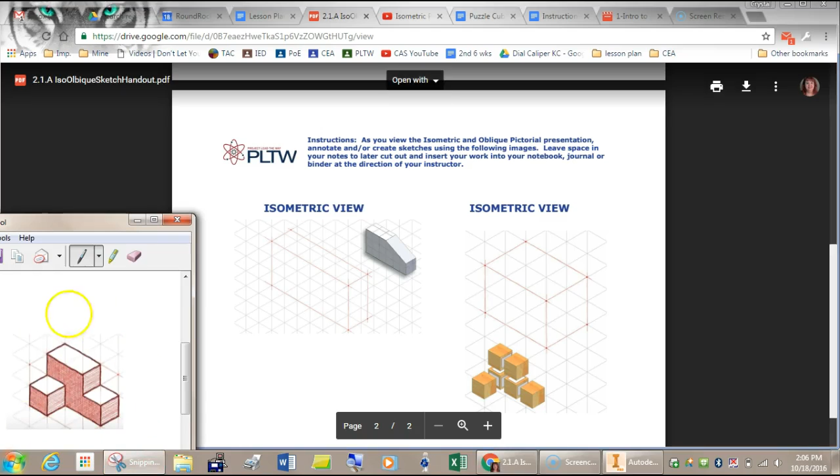Okay, I'm going to show you how to do a practice piece here. We're actually going to make the piece that we originally did right here in our isometric drawings. And I have the drawn one over here for us so we can look at it. And we're going to make that in Inventor.

I just open up Inventor, and what I want to do is I want to make a new part. And I want to make a standard part here, but I have to make sure I'm in the right project. When I click on projects, it should have this other Inventor checked with a check mark. If it was on another one like this, you just double click on this and it pops over there, and now I'm good, and I'm going to hit done. And I have this highlighted, standard part, and I'm going to click create.

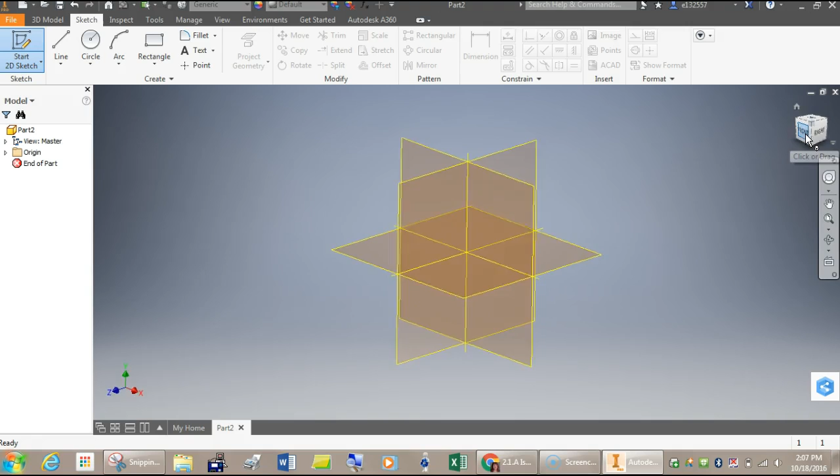And I have a blank place that I'm going to create my part. So the first thing I need to do is I need to sketch out my part. I can click here on sketch, or I can click here on sketch and hit this one. And this is my three planes. Notice my little window over here. This is the front side, and the front side goes with this side here. This is the right side that goes with this plane here, and the top view would be if I look down on this plane. I find it easiest to explain to you if I just show you by clicking here on front first. This is the plane we're going to sketch on.

So we're going to hit Start Sketch, and I'm going to click on this one here to start my sketch. Now you can click on line here, or you can hit the L button to start a line. Either way. And if I start with the little green dot here, you'll notice the green dot is right at the origin. Now each one of our cubes, our little wooden cubes, is going to be 3/4 of an inch. So our first little piece here, it's 2 cubes high. So 2 cubes is going to be 0.75 and 0.75, which is going to be 1.5 tall.

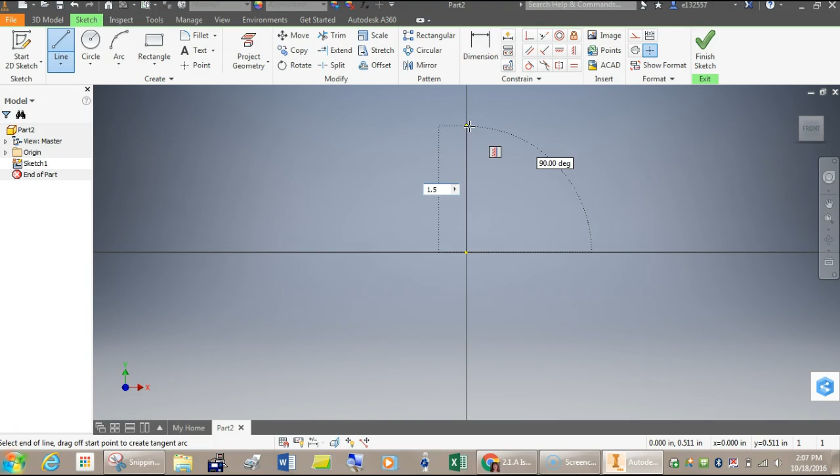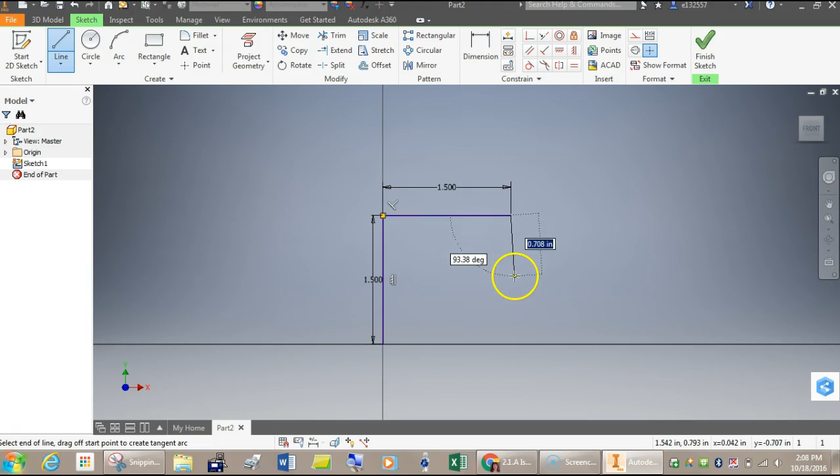So I'm going to type in 1.5, and when I hit enter, it's going to pop it up there for me. I'm going to use my scroll wheel to scroll out, and I'm going to push it down so that I can bring this over so I can look at it. Now I'm going to come over this way, and it needs to go 2 blocks over that way, which is also going to be 1.5, and hit enter. Now I need to come down 0.75, so I can just click 0.75, enter. Over this way, 0.75, enter, down, 3/4. Look, I can even do 3/4 like this. It knows exactly what I'm doing, 0.75.

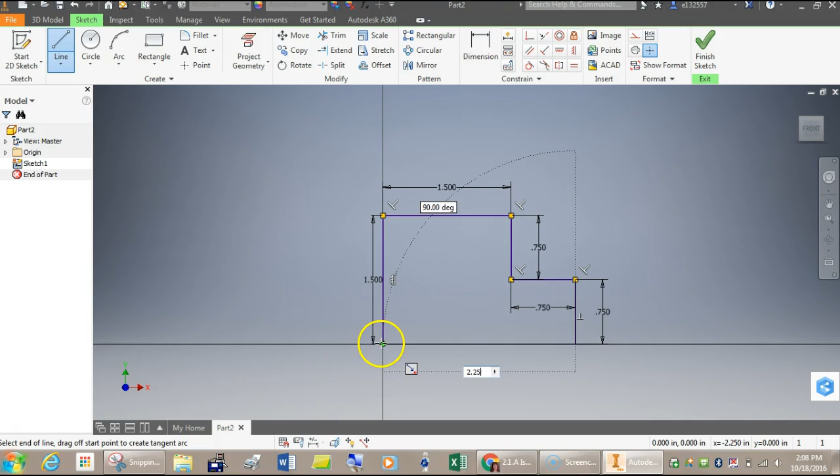And now I need to come back over. 0.75 3 times is 2.25. And I can click enter. Notice it's also right there where my green cursor is. Enter, and it's closed that box off. Right click, OK, and it finishes that up. So it's not trying to draw any more lines. And I have to click the Finish Sketch. I'm going to once again scroll a little bit and pull it over so I can see it. Now I've got a flat 2D shape.

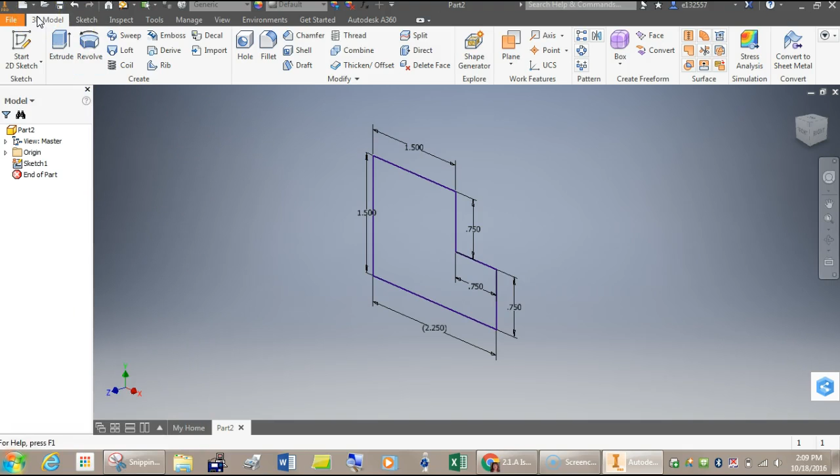I really want it to be 3D. I need to bring this out here. So that's going to be Extrude. So I click on 3D Model because I need a 3D, and I'm going to click on Extrude. And there's only one thing here, so it knows that that's the one I want to do. Now I don't want it to extrude 1 inch, I want it to extrude 3/4 of an inch. So you can type in 0.75 or 3/4, and it'll do that. And then I hit enter, and it's made that part of my shape. Let's check. That looks good.

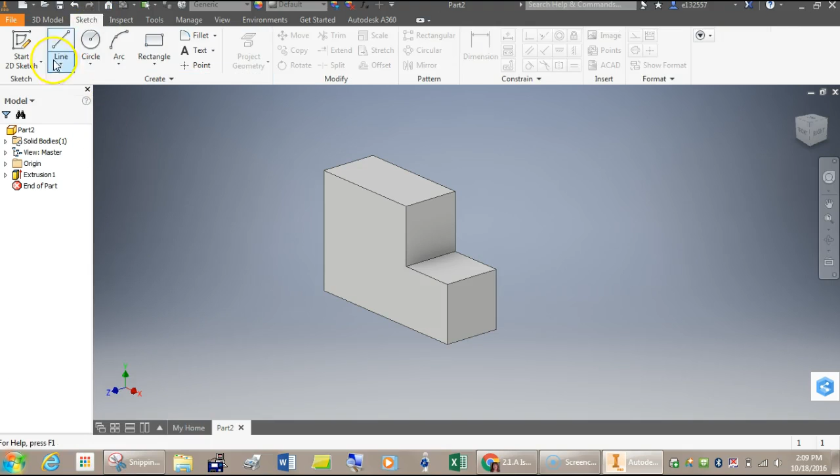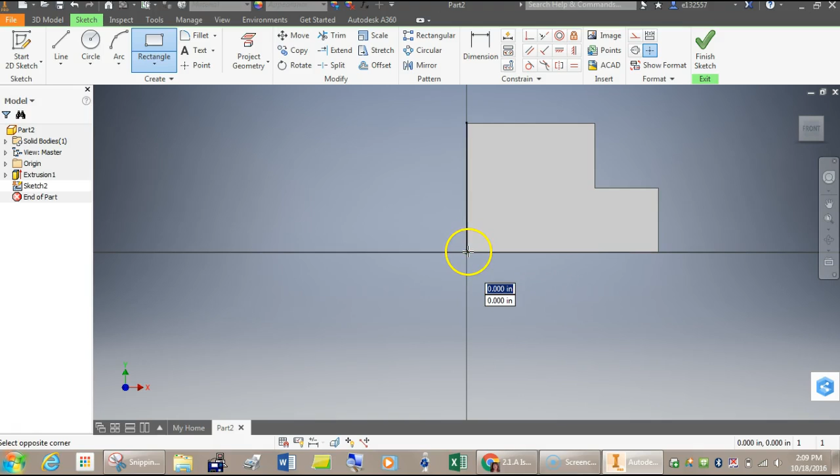Now I need to add this little cube on here. So what do I need to do? I need to make another sketch. Click on sketch, sketch, and I want to sketch it on what part? Well, I want to sketch on this flat part here. You can make another with another line. I'm going to show you how to use the rectangle because I really like the rectangle. Notice when I get over here, if I'm close, it's not a green dot. If I get right on there, it's the green dot. It means I'm right on the corner. Now I'm going to come up here, and I want this to be 0.75. So I'm going to click 0.75, tab, we'll go to the other one, 0.75, enter, and there's my box. Finish sketch.

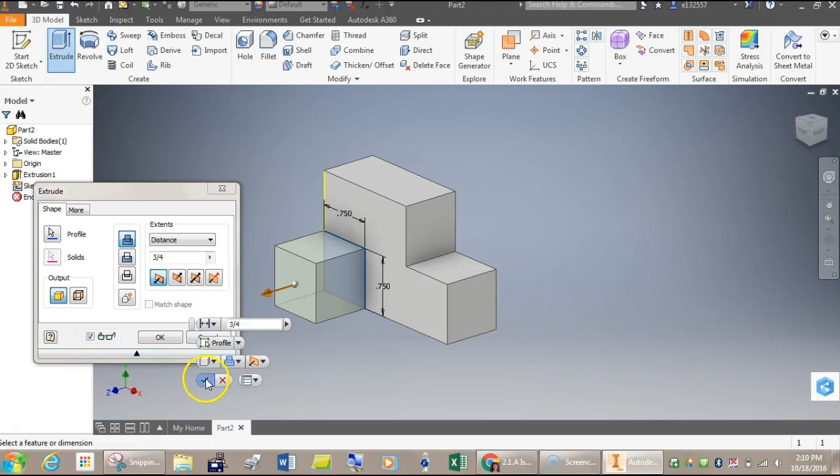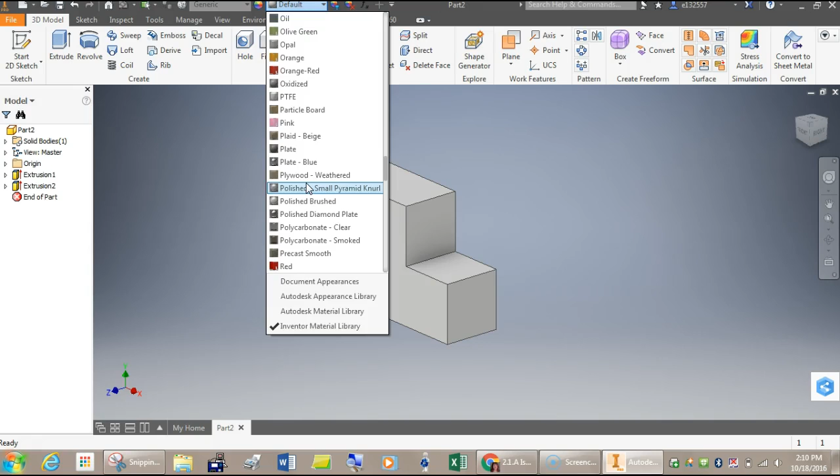And what do we need to do? We need to extrude that one. Go back to 3D model, extrude. When I highlight over that one, it pops out, and it remembers I did 3/4 last time. That's what I want, and hit check. Now, when you make your actual puzzle cubes, you're going to make these a color, so we're going to come up here to default. For our practice one, you can just make it any color you want, and you can just scroll through this list. So I'm right here at default, scroll down. I'm going to make this one pink, and it made it pink for us.

I still want to save it. File, save as. It's saving it into my folder in Inventor. It's saving into my H drive, IED, and my other Inventor files. When you're working on your puzzle cube, you'll put them in the puzzle cube folder. But for these, we're going to put them in other Inventor. When you're working on your puzzle cubes, you'll call it pieces like green piece, red piece, etc. But we're going to call this practice piece. I do want you to name them the way I tell you because I'm going to check them in your folders and I need to be able to find them. So save that as practice piece, hit save, and it saved it for you. We're going to come back and do something else on our next part, but there's that.